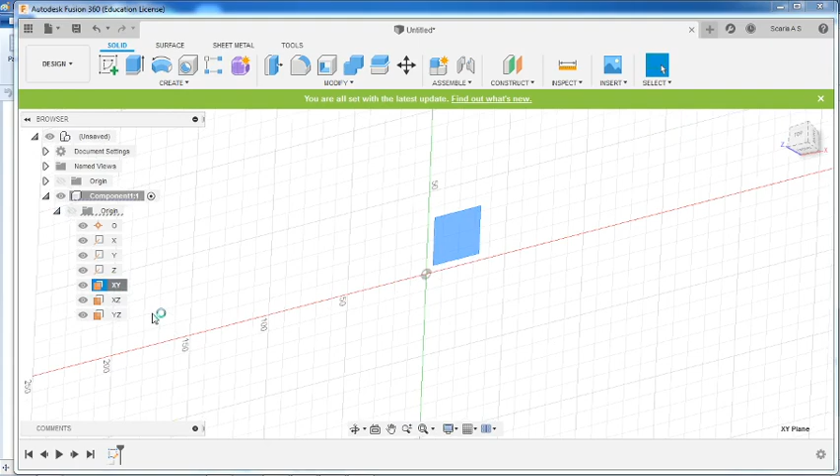Insert a new component, select our top plane, right click, create sketch. Draw a rectangle. In this particular exercise we will do it this way: create a point at the middle here, another one at the middle of this, then we will make this.

Then we will give this dimension. This is 290 and this is 140.

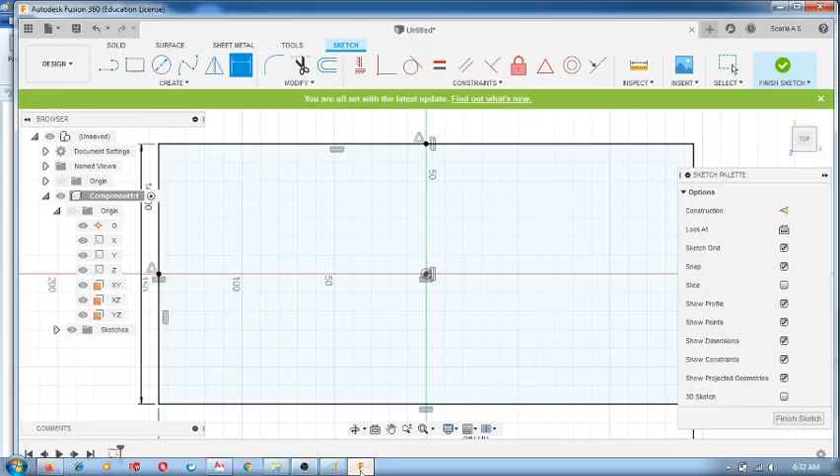I think we will draw the holes also. Let us draw the holes, making all the holes equal with equal diameter.

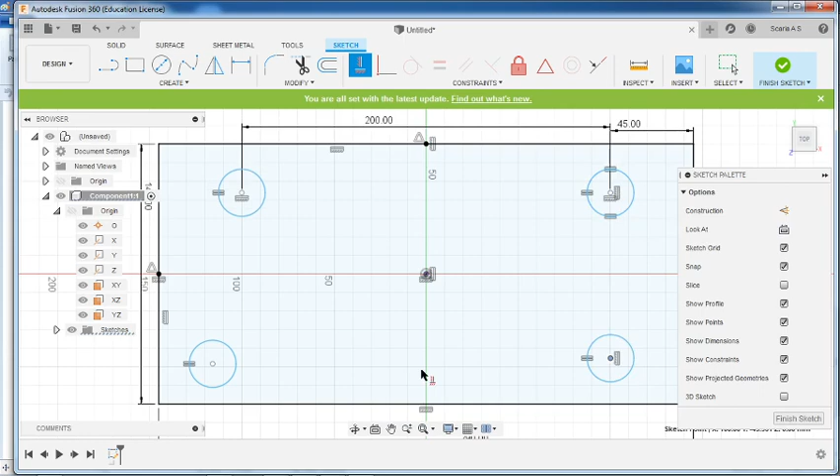Just define the dimensions 45 and 200. So this is 45, 200. Let me make this horizontal, this vertical, again this horizontal, this vertical.

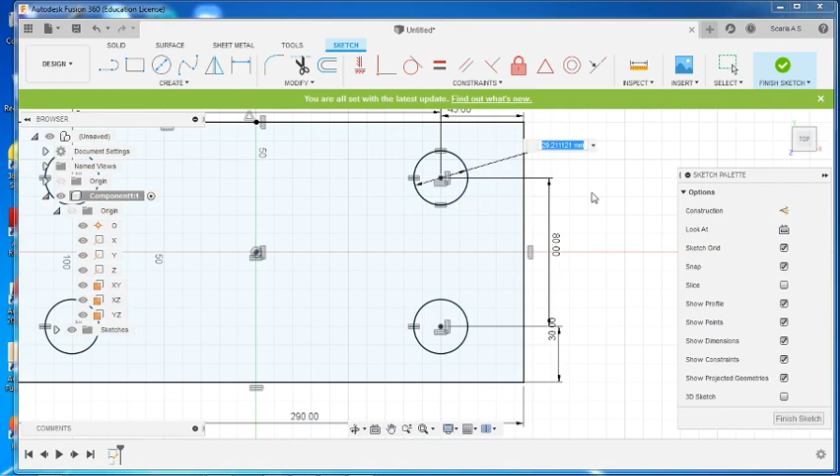Finish sketch. Now we will extrude. This height is 40. So this is our component.

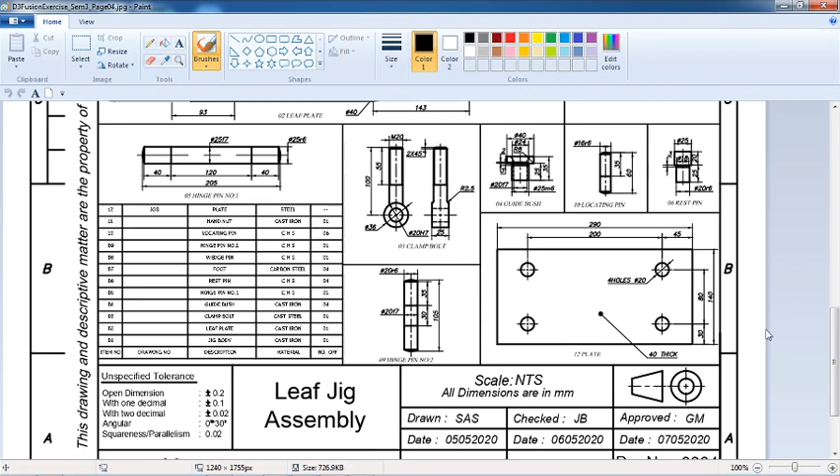Now next we have to decide. We will be making the base plate where the component can be located. So this is our base plate or jig body. Let us start this. I think it is better to choose the top view as our reference.

The total length is 510 and the width is 250, including these two projections. So we can select 200. Total length, let us say this is 510, subtract 25, so 510 minus 25. So we will draw this.

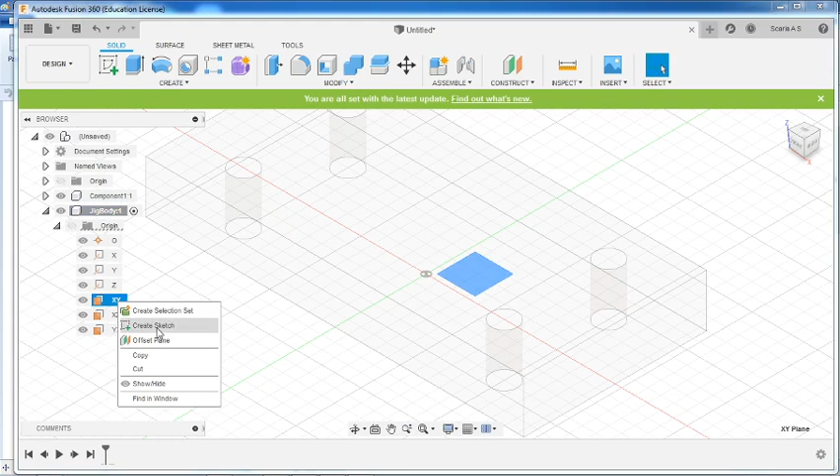New component, rename this as jig body. Once again, here we are not switching on the origin. We have got all the information on how to select the particular plane. So go here, create a sketch. Let us draw a rectangle.

Simply draw a rectangle, and this dimension, this length here is 510 minus 25, that is 485. This length is 200, 50 we will add later. This is 200.

I think we will right away make the other clamping provision also: 25, 25, 40. Let us draw that also, draw a rectangle. Draw both and make collinear.

Let us trim, we'll trim the opposite way. Then we will give equal. This is 25 and this is 40.

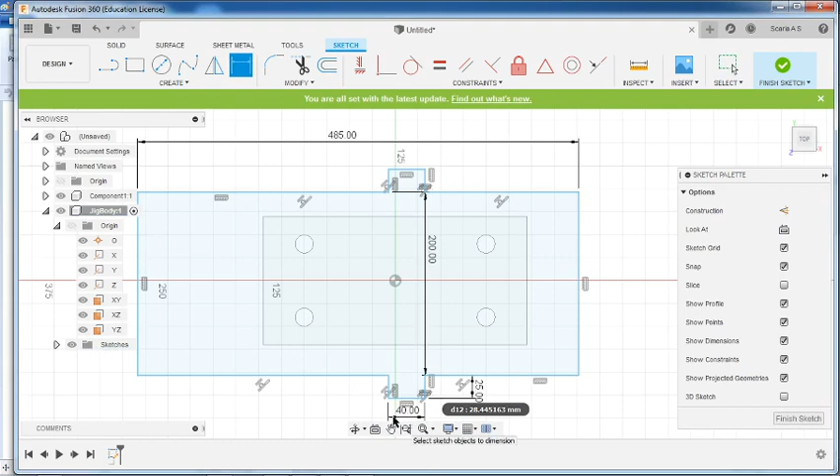Now we have to locate some dimension from the edge of this hole. So that is the next step. We have to find any hole which has a given dimension. If it is not given, we have to find it out. So let me check it out.

We can see one thing: this is from the center of this particular object, 100 away. And here it is given, 227 towards the center. So I think we will find out this dimension, 163, 30, 60. Let us make here also.

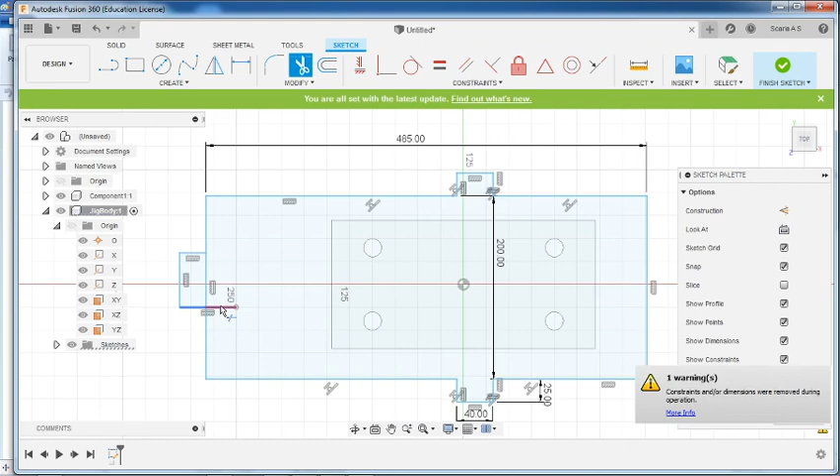Let us draw another rectangle here, then trim it, and give the dimensions. This is 40 and this is 25, 25. Then just make some points, that is 60, 30, 163.

Just create a few points here. Now give the dimension from here to here, it is 60. Forget about the 30, now we will give 163 plus 30.

Towards the middle of this, create one more point, 163 plus 30. This dimension we will use later. Now we have got this point, from here we can define another these 4 holes.

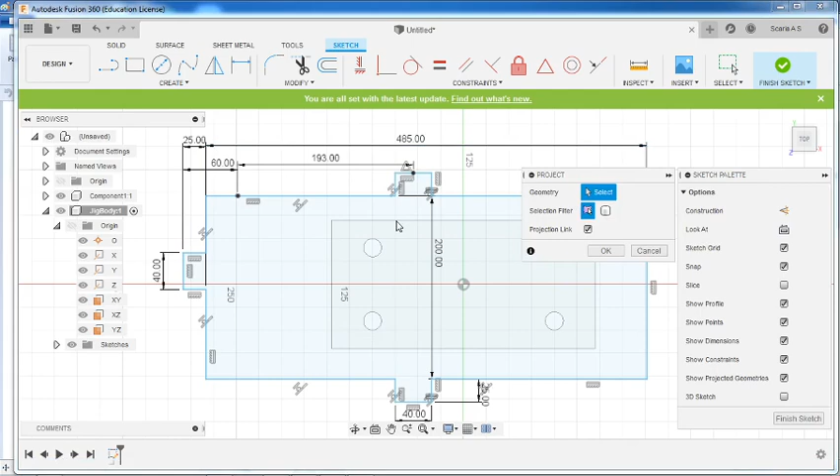Let us do it this way: let us project these holes, press P, so these 4 holes will be at the same location. Project one by one, not the face, only the circular edge we have to project. Now we can define the dimensions.

From the middle of this we will give the dimension as 100, from here to this particular edge will give the dimension 100.

Now one more dimension we have to find out. Let us imagine this is located at the center, so we will give 40 from the origin, so from here to this center, it is already aligned.

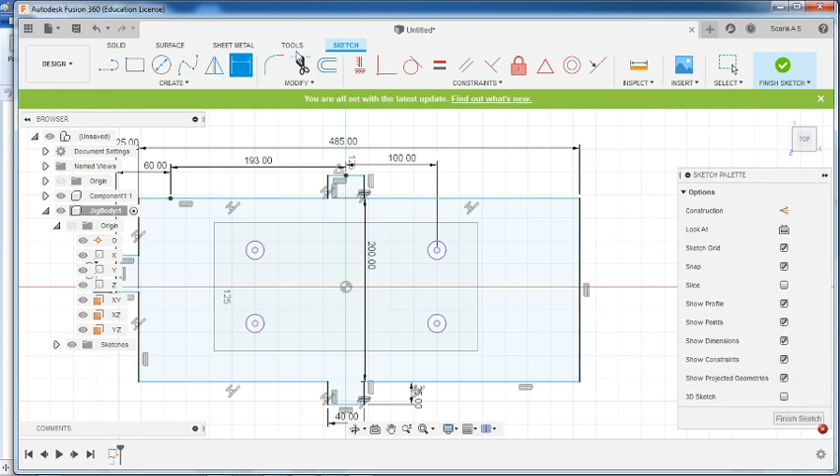Now we have to give symmetry, that's all. Just draw a line, then convert this line, otherwise we will give the distance. The total distance is not given, so let us give that one: 200, it was given earlier.

And from here to, let's say, 100. This also we have to ensure. Let us give equal, so let us give this both equal.

It's not working. Okay, let me try this again, equal. Both these lines are equal. It's not working.

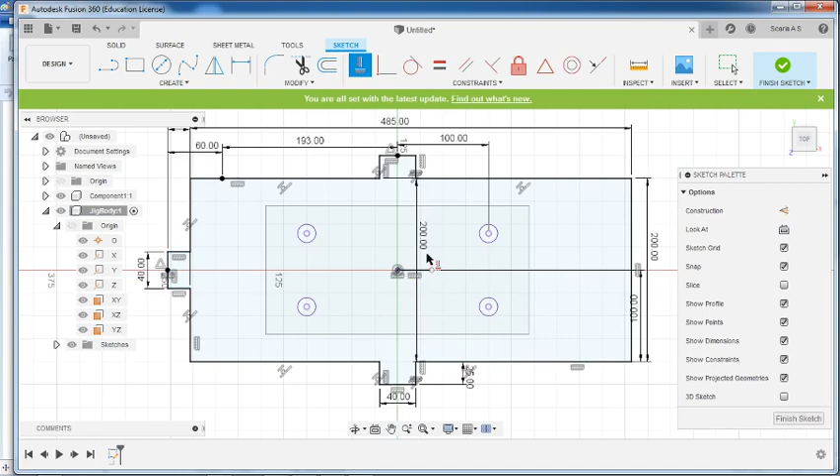Okay, so what we will do is create one more point, create a point, now let's say, okay, now we will extrude this.

So many holes are there. If we need, we can make these holes also, 150 by 78, 150. From the center we will make the other holes also. Let us make those holes, 1, 2. Let us make all 4 holes, then make it equal. Then, let's say horizontal here.

Vertical, this is horizontal, then this is vertical. Now, so we will draw once again another line, a center line. Select the line and press X.

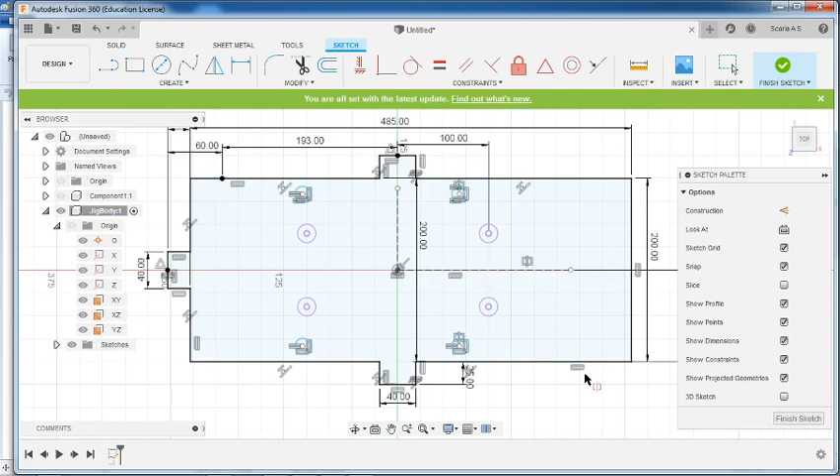So actually I want to, let me turn off this component here. It's X. Okay, now let me make a symmetry constraint. So this center point and this center point, symmetry about this. Once again, this center point and this center point, symmetry about this.

Now let us give the dimensions. So this is 150, 150, and what about this 78, 78. So from here to this is 78. Okay, I think only one dimension is required, automatically it will maintain the other dimension.

Now what is the diameter? Dia 16 H7, 6 numbers. So this is 16. Now another 2 more holes are there, so here from this center it is 53, 35, 35.

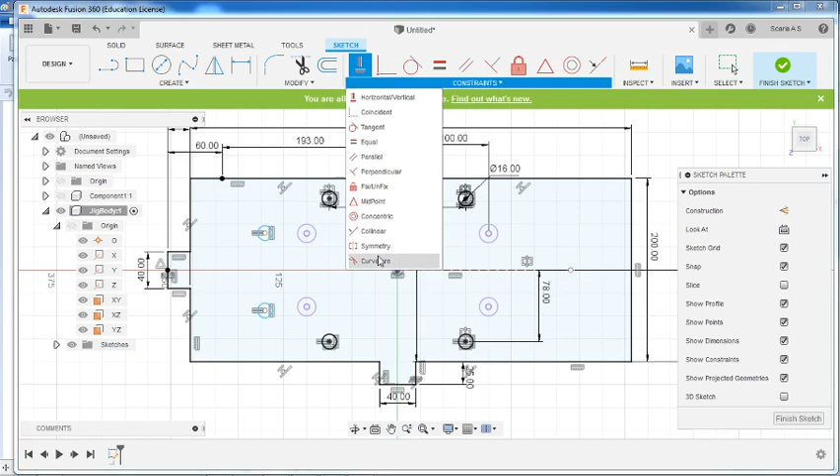So let's say equal. Then we will give symmetry also. Symmetry, this. Okay, now from this hole it is 53. This is 53. Only one dimension is required, so let's say this is 35.

So let us make another 2 more holes, 4 more holes, that is dia 20 H7, these 4 holes. Okay, let us draw somewhere else. So let us make equal. So here a spot face is there, that we will do later.

Diameter 20, so first we will give the diameter 20. Okay, then horizontal and vertical we will add. Horizontal, so this both are horizontal and these both vertical. Okay, now let us add symmetry also. Symmetry, similarly here.

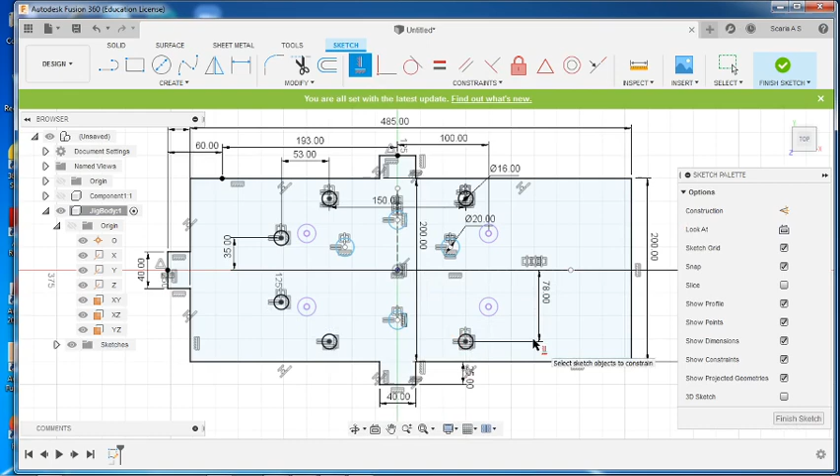So this is passing through the center, so we can give vertical constraint with this center point and this center point. Similarly horizontal with this. One 125, 50, 50, so 2 dimensions. So dimension, this is 125. This is 50.

Okay, I think most of the entire whole features are completed. So remaining things, okay, if we want we can make these things also, 4 holes, dia 40 H7. Okay, we will do it later, after making the fillet it will be very easy.

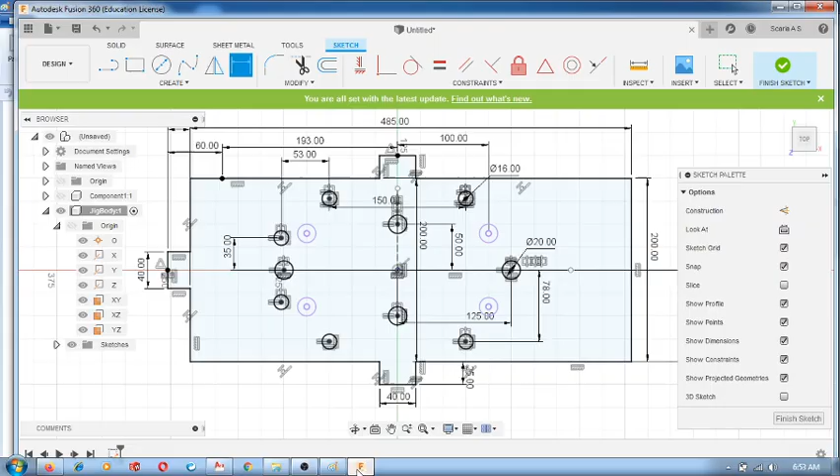Now the thickness is 35, so this thickness is 35. Let us extrude, finish sketch, extrude, so this is 35.

Now we can add the fillet. So some small fillet is there everywhere. The value is not given, so it is not important. So R10 is given here. Any information available about the fillet? Okay, we'll give R5.

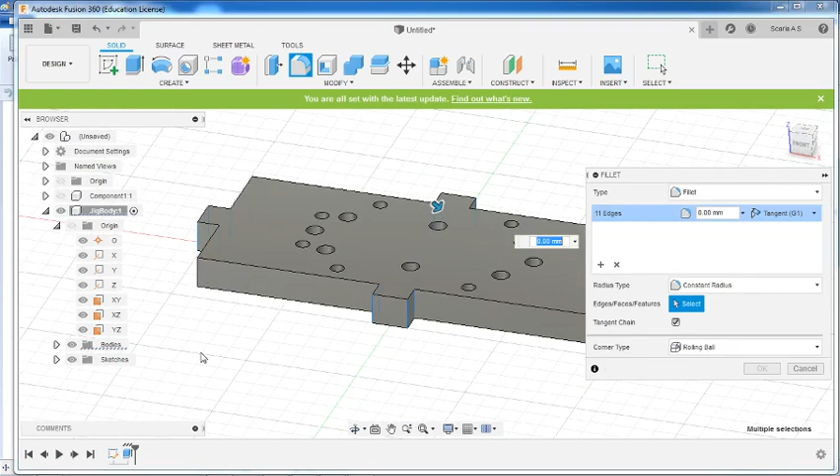So fillet, select all the edges, required edges. Okay, just that is not very important, we will give R5. Next, here we have to make a fillet, so that value we have to find out from here.

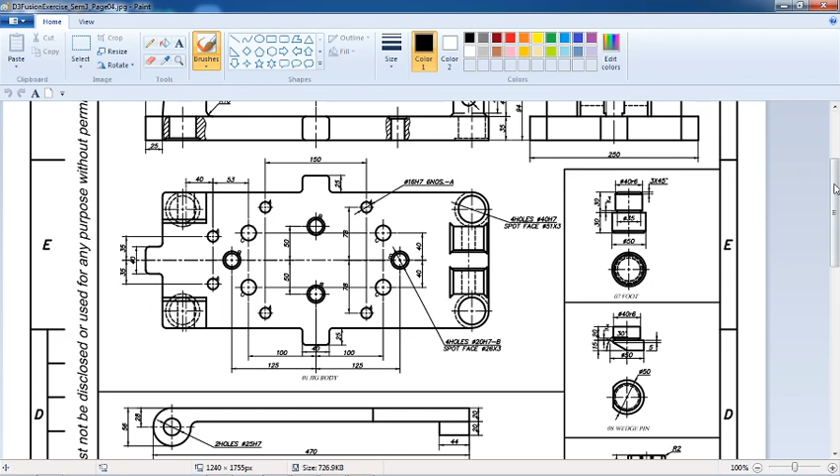Okay, so this counter bore, what is the spot face? Dia 51. So we will give a radius of 25. So fillet, this one, these two edges we will give 25.

Now let us make a hole. So here 4 holes, dia 40 H7. So we will draw that on the opposite side. Opposite side we will make. Okay, let us rotate this.

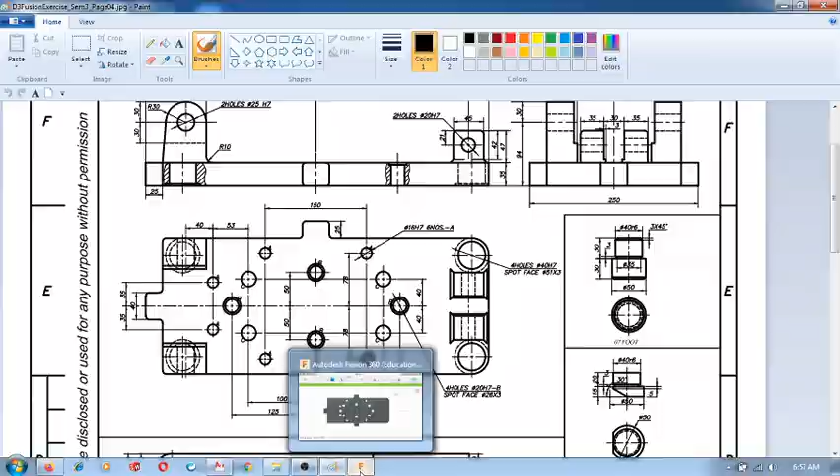So let's draw a circle, so equal, diameter is 40 H7. Also this dimension is not important, it is not mentioned here, so we will give the same 25, same value 25 from both the edges.

So before that we will make it horizontal. Okay, then vertical also we will make this. Okay, then from here to here it is 25. Finish sketch. Now extrude, so this extend all, then okay.

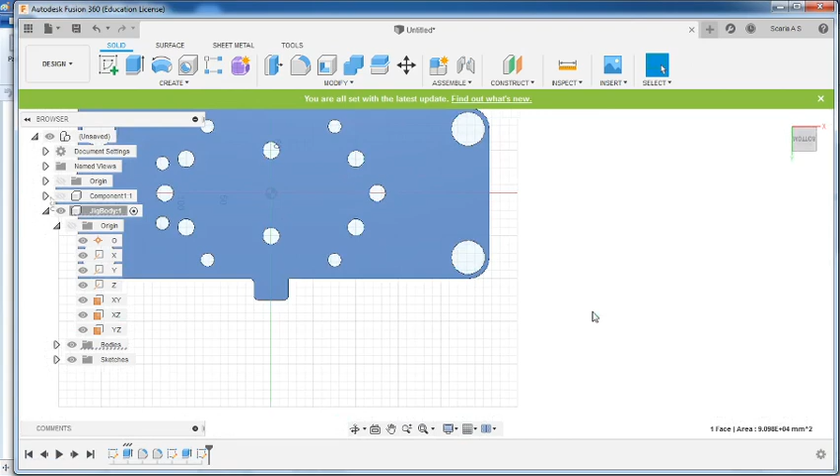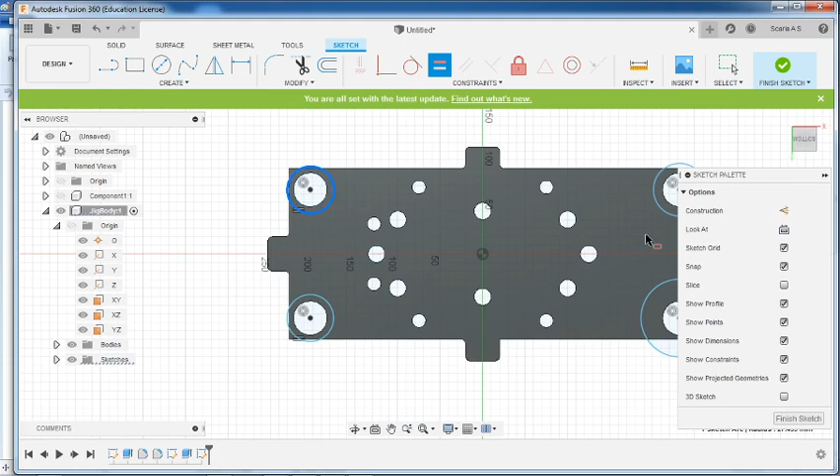So I think we will make the spot face also. So spot face dia 51 into 3, that is on the bottom side. So here, go here, create sketch. So draw circles, simply draw circles, so let's say equal, finish sketch, then extrude.

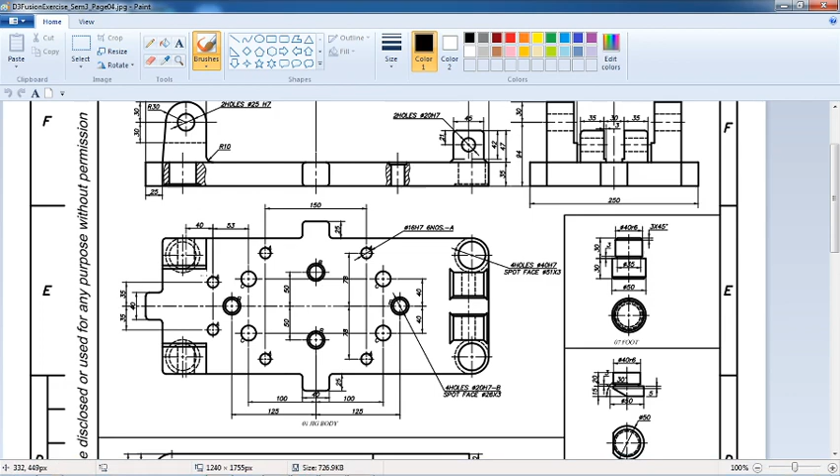-3. If required we will edit any of the dimensions, because okay, that we will find out later. This here also we have to add a fillet, so let us add fillet, 25. Now okay, I think this is not 25, some other dimension it is.

Okay, let us find out later. So now we'll draw this shape.

So how much is the distance? 120 mm away from the center, so 60. Let us offset a plane, construct offset plane.

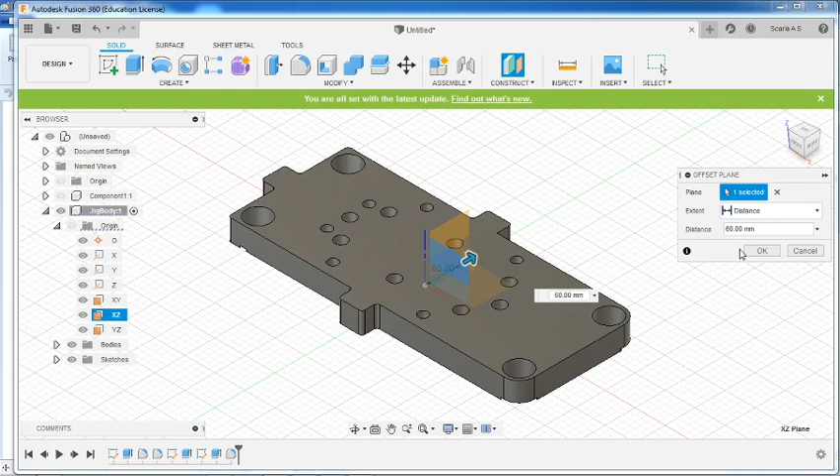So this 60, give 60, minus 60. Okay, 60, we will make 60. Then on this plane we'll create sketch.

So let us draw the shape. Okay, just simply draw this shape. I think the shape looks something like this. So here one is vertical, another one is at an angle. So this one is vertical.

Now we will give coincident. So this coincident. So from here it is 60 and 30. Sorry, this is not coincident here. Okay, so let's give the dimension. This is 60. This is 30.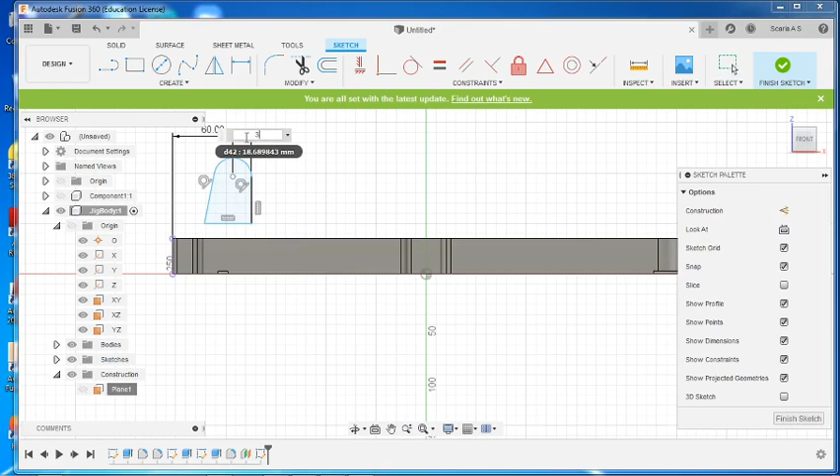Now let us make this coincident. Okay, otherwise we will give horizontal. So 60. So here 25, so we can give from here to this edge as 25, and the height we have to find out.

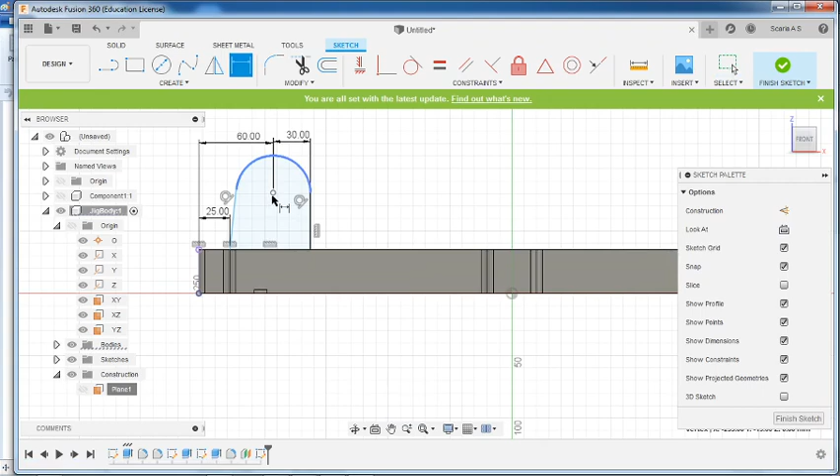Total height is, from the bottom it is 94. So this from here to this center it is 94. I think let us make the hole also here, that 25H7. So this is dia 25.

So this we can extrude 40 mm height, then mirror it. Finish sketch, extrude 40, then OK.

So this circle is at the middle of this, so let us edit this. So this circle here, the sketch, instead of 25, it's 30.

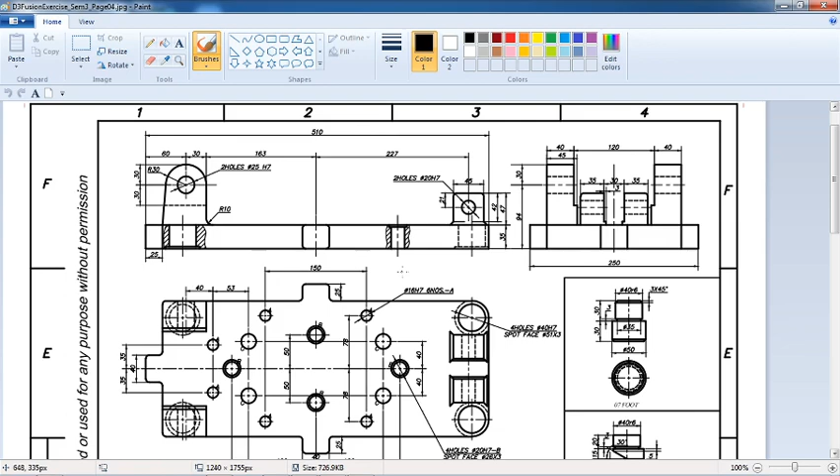So this is how much? 25 plus 35. Plus say 30. So this is 30. Finish sketch.

Now here if you look at here, this particular portion, here we have 5 mm extrusion is there. From the center it is 30.

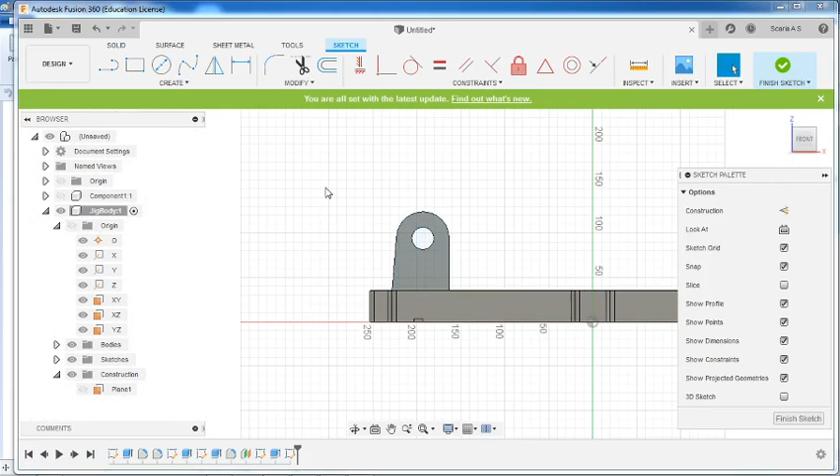So select this face, create sketch. So directly I am going to project this. Press P, select this face, then OK, then draw a line. OK, then give the dimension from this center point to here, this as 30. Now let us give coincident.

So this, OK, finish sketch, then extrude this 5 mm. What happened here? It's not new body, join. Okay.

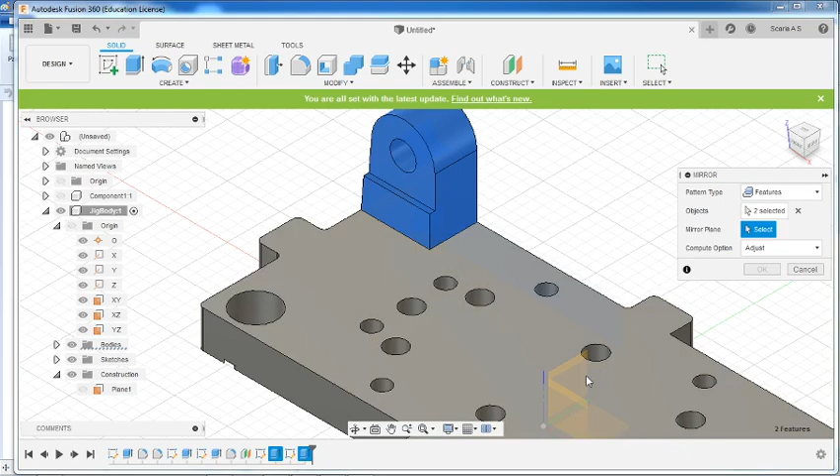So now we can mirror this feature. Create, mirror. So features, both the features, this extrude, then mirror plane, select the mid plane, then OK.

So I think here this fillet, okay, let us find out later. Okay, this is over. Now here this particular portion we have to find out.

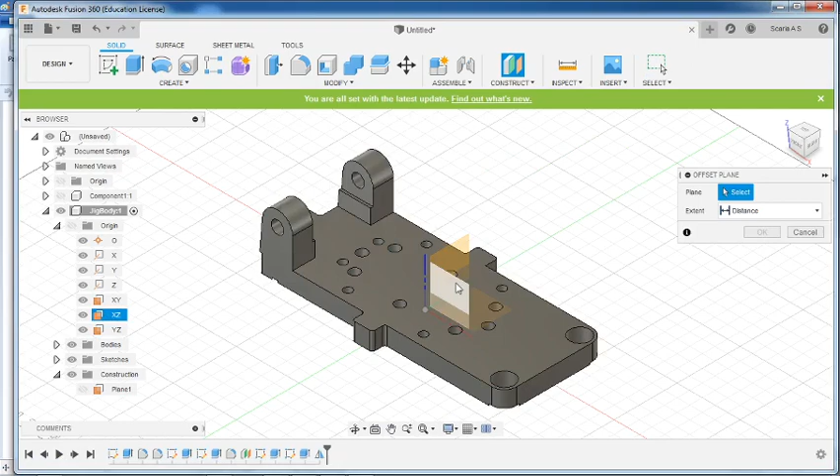So this distance is 30 mm away from the center. So 15, we will offset a plane, construct offset plane. So from here 15, and on this plane create sketch.

So let us draw a rectangle, then check the sketch. So the height is the height, 47, from the base. So let us give the dimension. This is 47.

So this I am giving horizontal. Then 45. So this is 45.

Then this edge here, some chamfer is there. Okay, now we have to find out from the center. It is 227, so there is a distance 227, so we will make that.

So create a center point. Okay, then from this point to this point, it is 227.

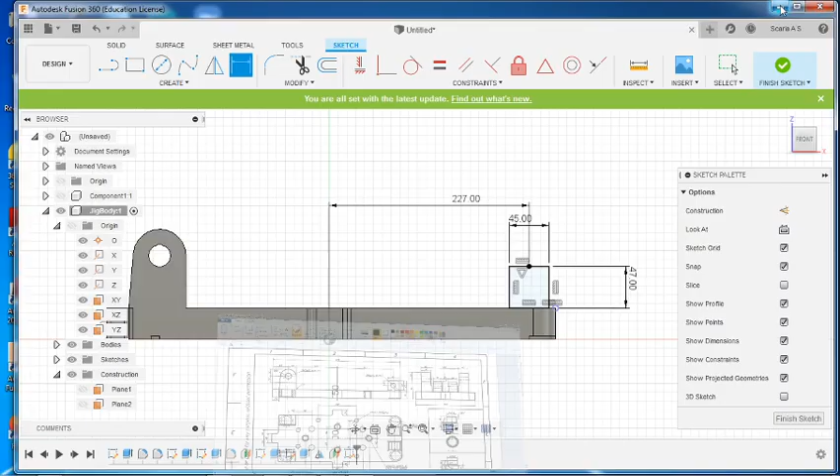I think we can draw the hole also. So 2 holes, 20 H7. So let us draw. So this diameter is 20. Then let us give vertical, 21 from the top. Okay, so we can finish sketch.

So now what is the thickness? 35. Extrude. So it's 35. Okay.

Now here again there is a small extrude portion, three mm. What is the distance? Distance from there 42. So on this face, create sketch. So press P for project. Okay, then draw a line.

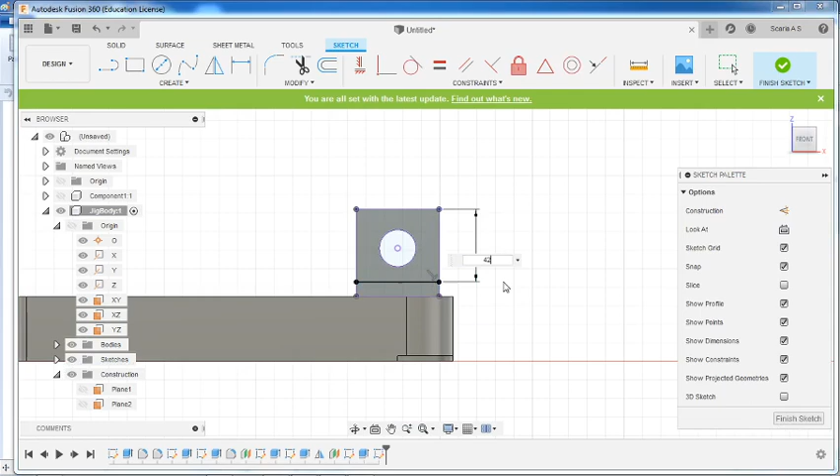And this is 42. Finish sketch. Then 3. Extrude. Here 3.

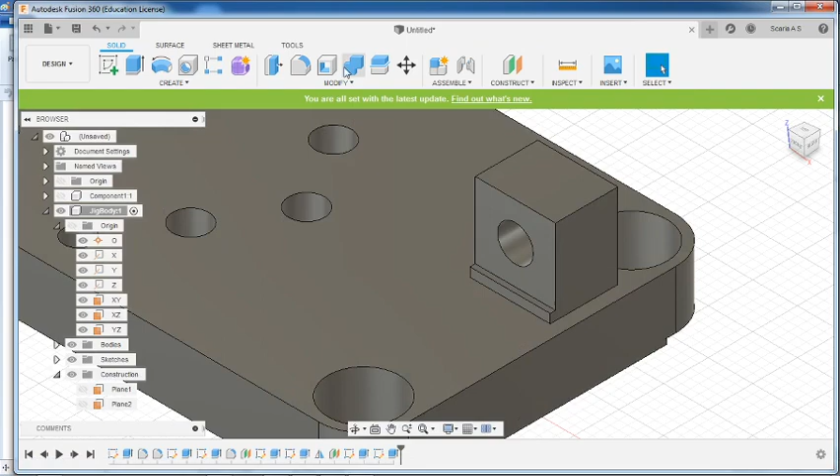Now we can add chamfer also everywhere except this end portion here. Modify chamfer here.

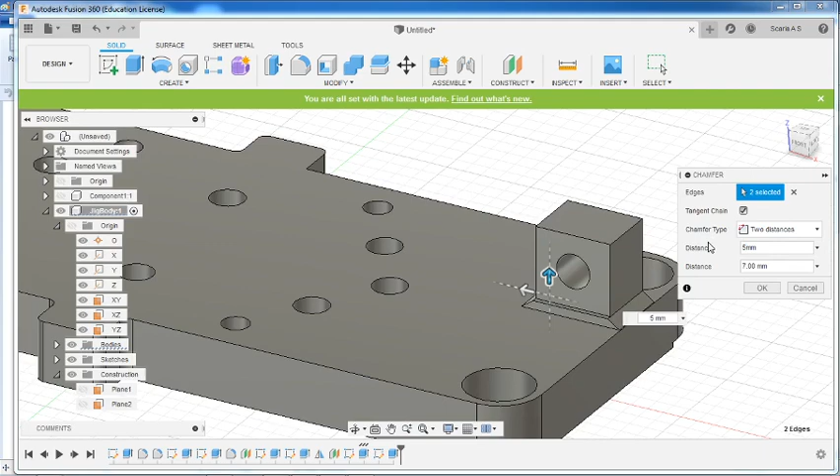So let's give 3 and see. Five, I think 6, 7, 8. So we will give this 2 distances. One is 7 and the other side is 3. 4, 5. Okay.

So let me edit this. So 7.5. Okay, something like this.

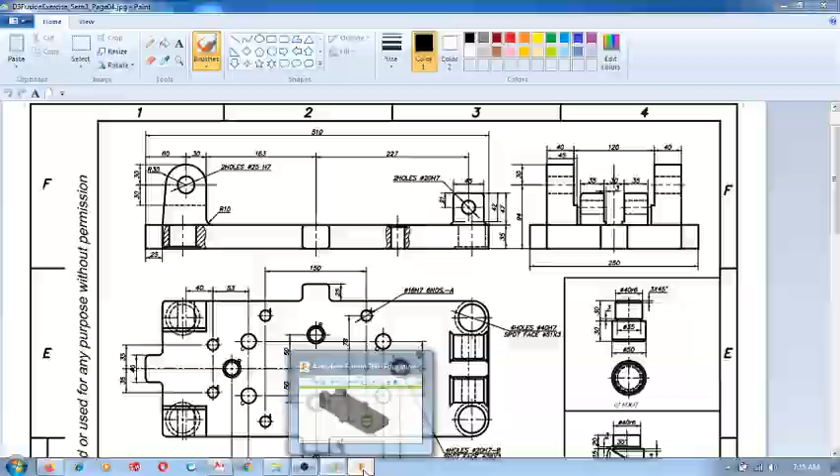Now we can add fillet on these 2 edges. So same 5 mm fillet we will give both edges, 5.

Now we can mirror it. Create mirror. So features, this extrude. Okay, first we will start from here. This extrude, second extrude, this chamfer, this fillet. Okay, then mirror plane is this, then okay. Oh,

Okay, let me select only this extrude. Okay, let me do once again. Create mirror features. So this extrude. So start this extrude and both this extrude, then mirror plane, this mirror plane, then okay. Why?

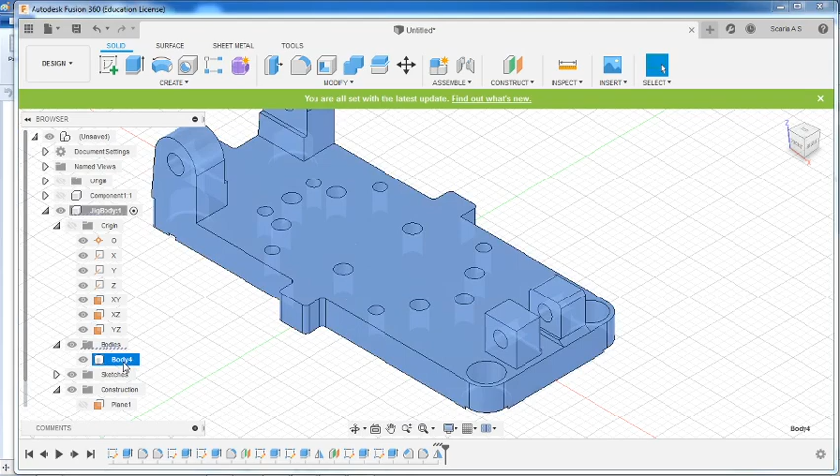Okay, let me add the other two features also. Edit feature, then go to press Control, then okay. Okay, so it is added. Now

So here we forgot to add the spot face 26 into 3, here 4 places. After adding that, I think this particular body is completed.

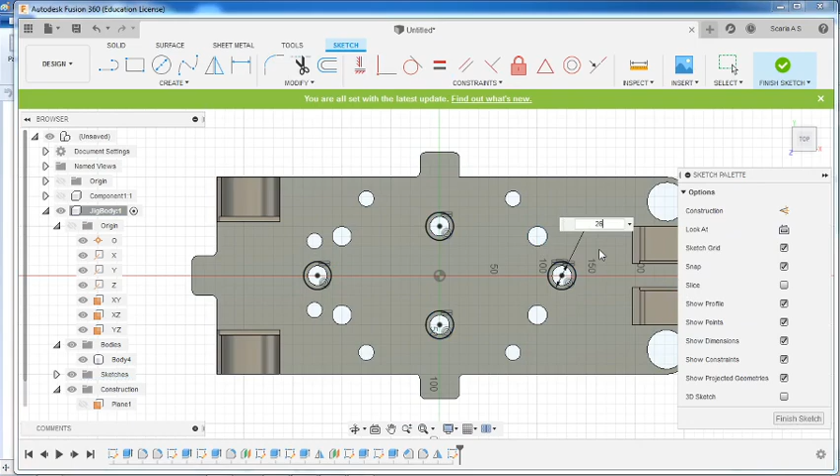Dia 26 into 3. So go here, create sketch, okay, let us add circles. Then equal, this is dia 26. Finish sketch, then extrude, so -3.

Okay, I think so if there is any fillet, let me check that also. We will make R10 fillet is there, so that we will add the R10 fillet. So fillet, this is 10.

Okay, I think everything is completed. Next we will make this portion. I think it is better to start using the front view. This way we will add.

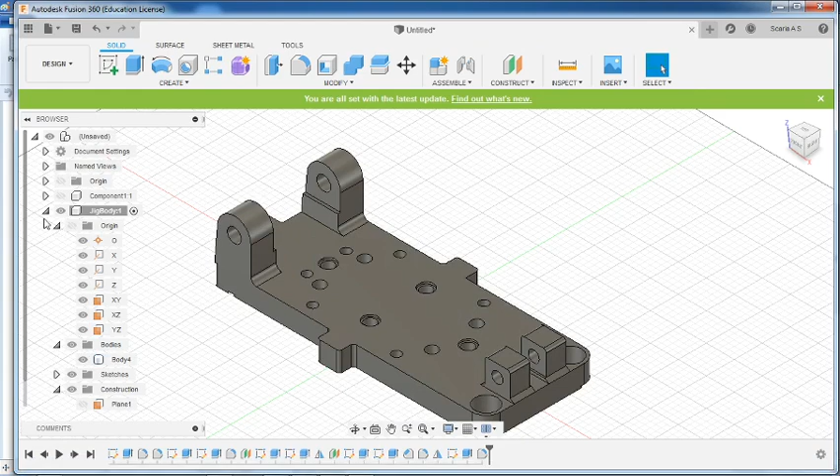Okay, add a new component. And what is the name of that? Leaf plate.

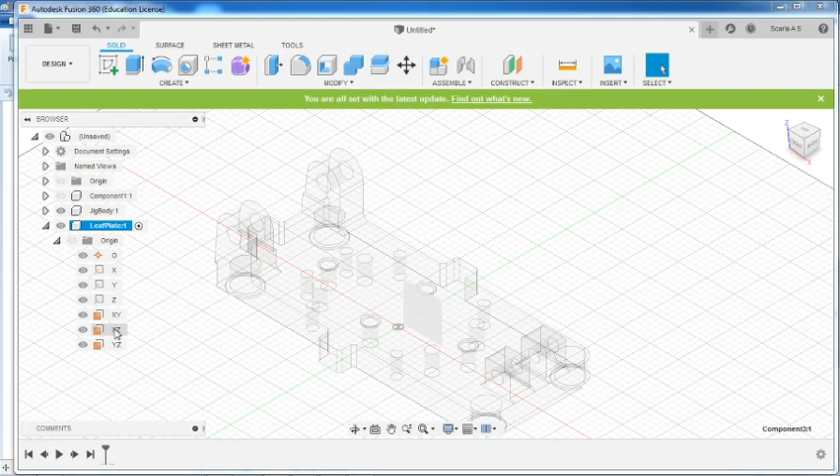Then once again we will select the XZ plane, create a sketch. Now if you have the understanding, everything will be coming and coinciding with these circles here. So we can project this. Press P. If you know how the leaf jig works, you can automatically press P and make the assembly here.

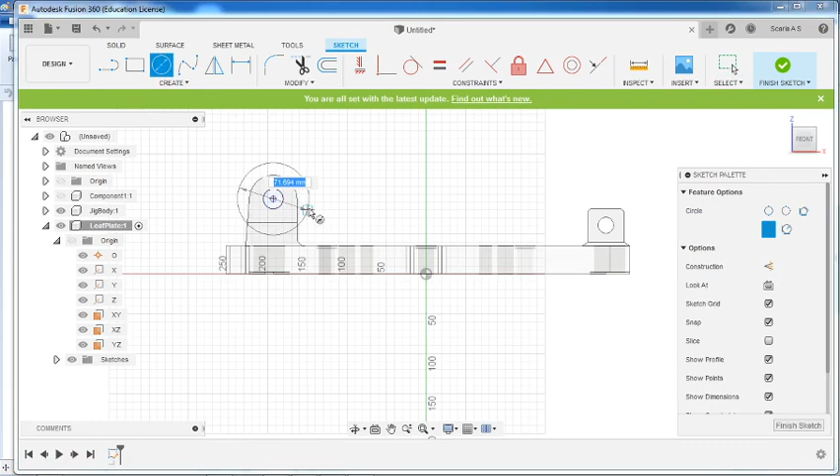So this is dia 25, and this diameter is 56. Let us draw a circle of diameter 56.

I think we will draw this till the end here. How much is that? We have to maintain the dimension using 93 and 325. We'll use 93 from this hole.

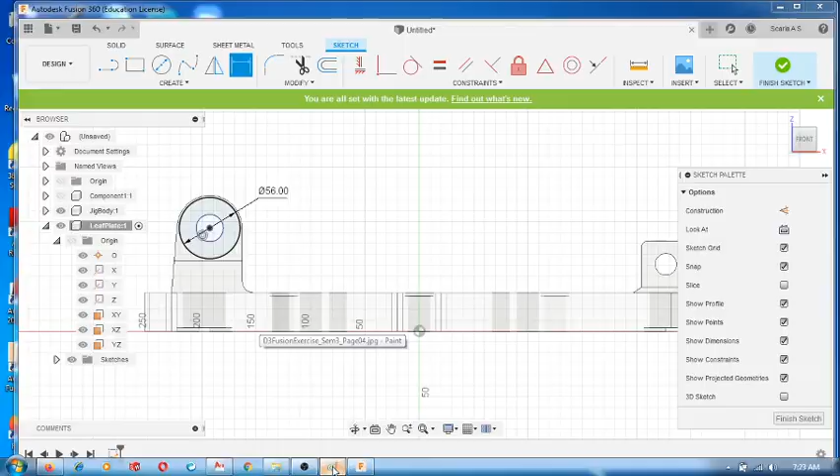So how to do that? We know from here to this center is 100, right? 100. So 100 plus 93 is 193.

So we will draw a line in this way. This is 20. This is 20. Then we will give coincident. This is coincident with this. We will add a tangent also.

Let us coincide here also. I think we will trim this portion. This is not required now.

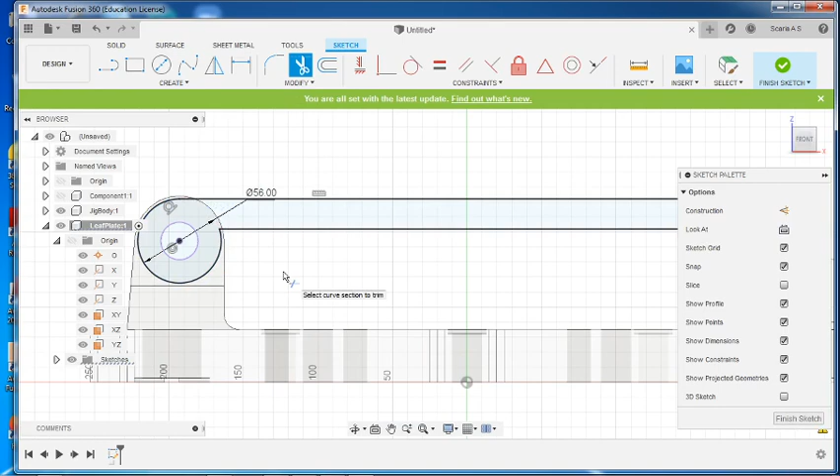Now we have to ensure the other dimension. From here how much? It is given 470 from the extreme edge here. So we can give directly 470.

Select this, then bring here, right click, pick circle arc tangent. This is 470. Okay, that's it. Now we can extrude.

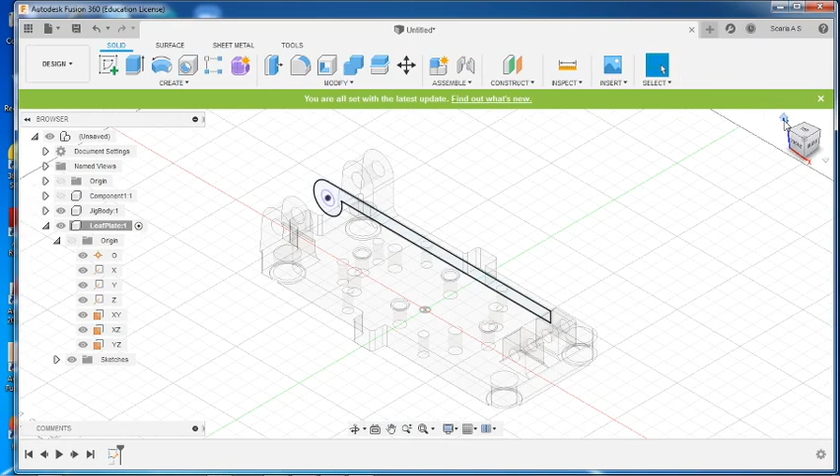I think we will extrude 120, then we will do the remaining portion. 120, finish sketch, extrude. So this is symmetric, this whole length is 120.

Now we will select this face, create sketch. Just press P and select this face, then OK. Now draw a line, find out the dimension.

How much is this? 35. How much will be this? 7.5.

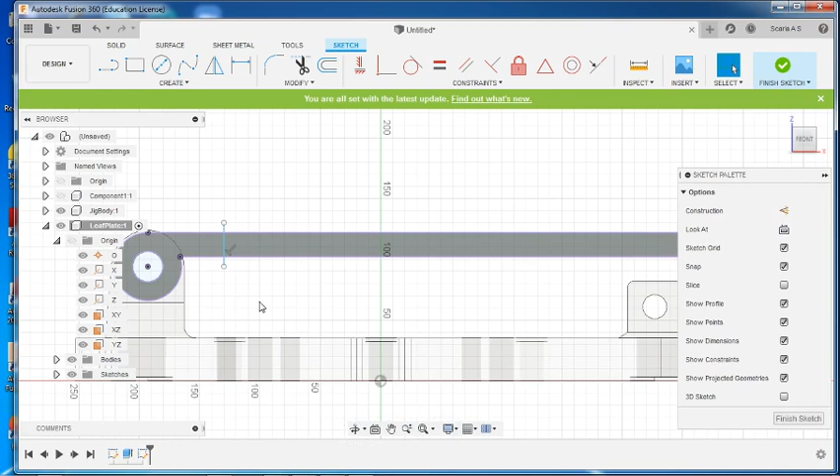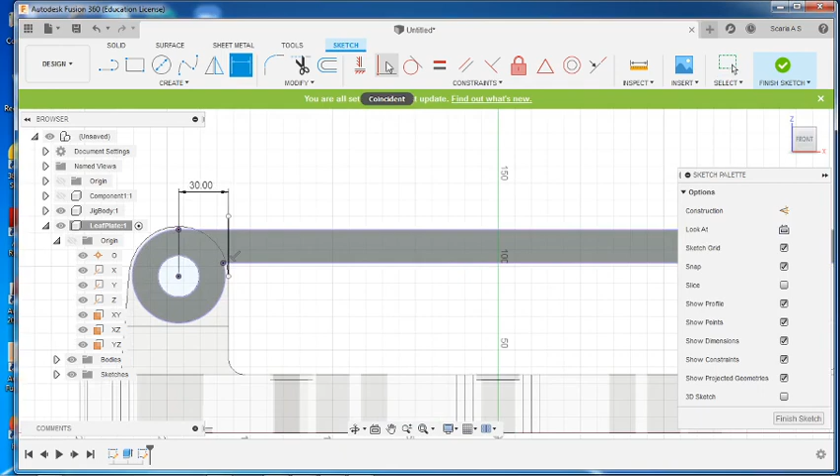Okay, we will use the curvature for this, we will give some dimension. Let's give 30, then coincident. Finish sketch, then extrude. This is 7.5.

Then we can mirror it. I think this. Create mirror. So this last extrude, then mirror plane, center plane, then OK.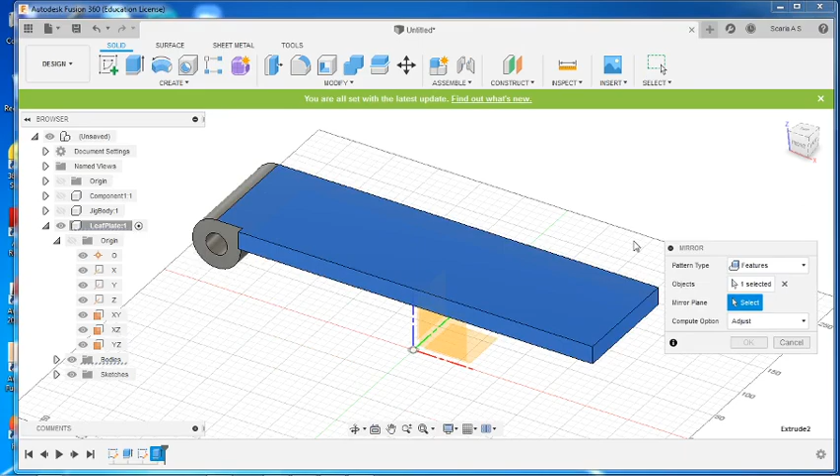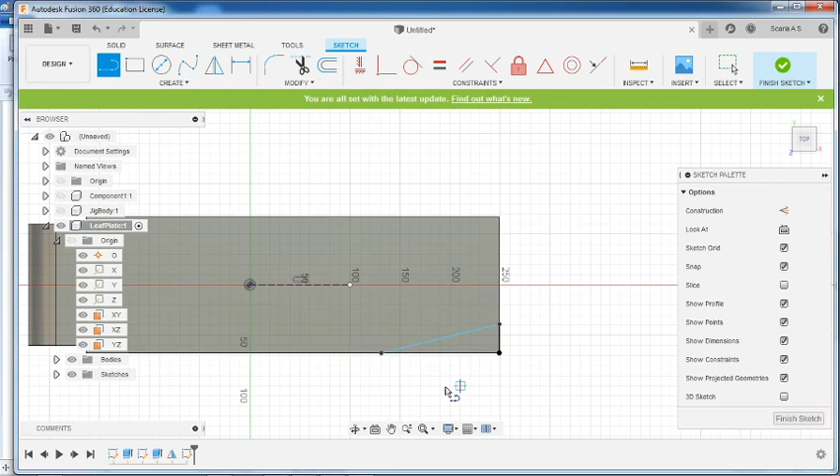Now we will add the angular cut, 143, 98. On this face, create sketch. Just draw a line, select the line, press X.

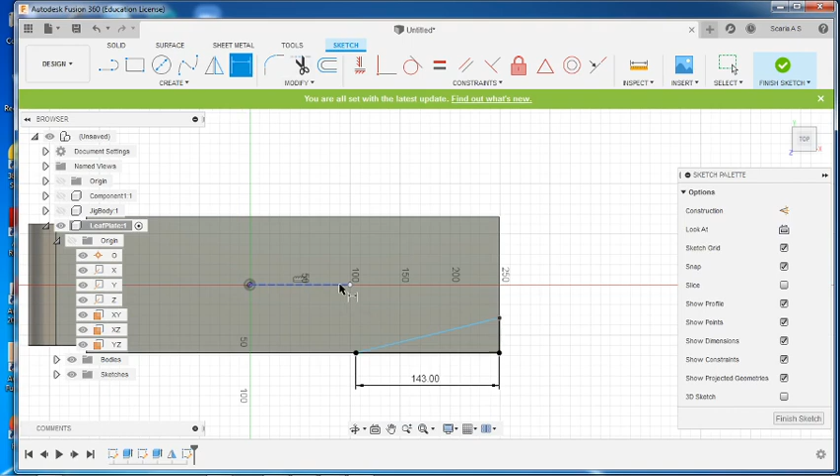So it's 143, and this is 49 or 98 divided by 2. Finish sketch, extrude, all, then OK. Then we will mirror it, create mirror. So this feature, mirror plane, this is the mirror plane, then OK.

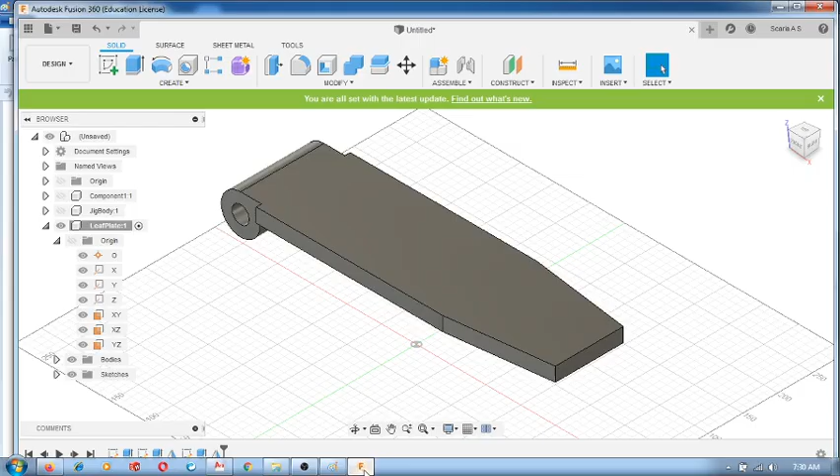Now we have to make all these 4 holes. Let us quickly make all 4 holes. The hole diameter is dia 25 H7. Create sketch. I think we will do it on the component.

This body I'm going to turn off for a while, so that we can press P and project. Press P. This is the easy way to get referenced with the existing. Then OK. Now let us draw circles. Let me give equal. I think I will make this as construction X.

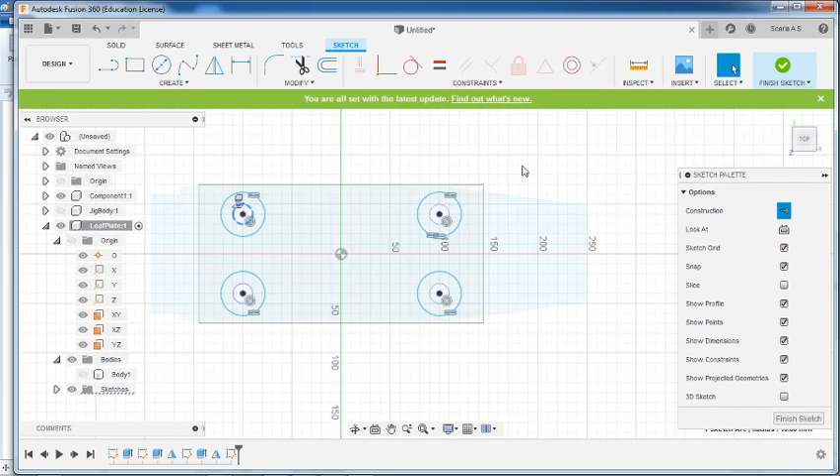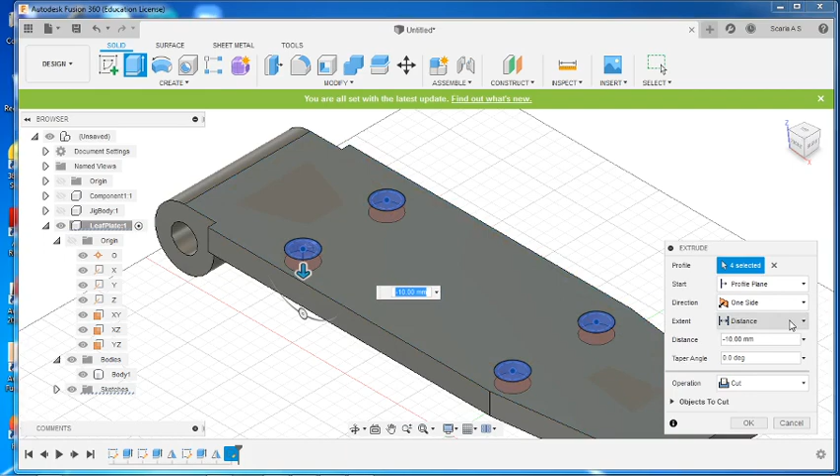Now we can give the dimension. This is 25. Finish sketch. I could have added one more hole. We will make that hole also in one step, otherwise we'll do it in the next step. Then change the direction, then extent all, then OK.

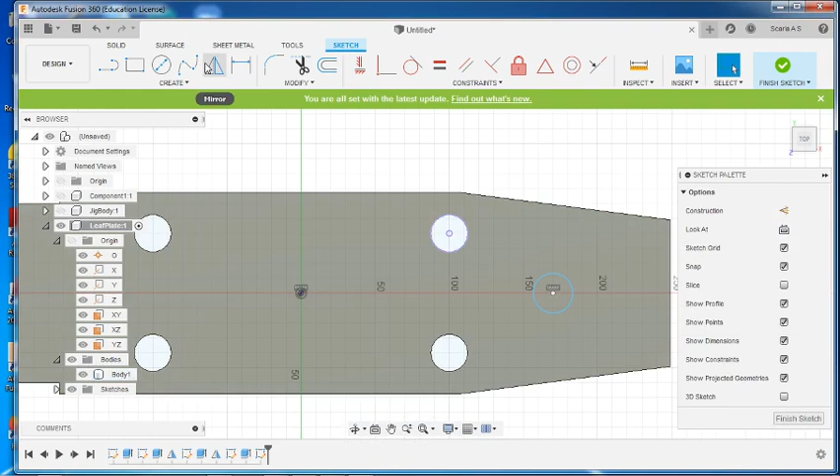Now on this face one more time we will create a hole. Let's say horizontal, and what is the dimension? From here 60 and the diameter is 40. Press P. And from here it is 60 and the diameter is 40.

Finish sketch, extrude, extent all, then OK.

Now here another, this slot also we have to make, 22. Create sketch. Let us draw in this way. This diameter is 22.

Let us give horizontal and one more dimension, 325 from this hole. We will do it in the same way. Press P, select this hole, then OK.

Then from this center point to this midpoint it is 325. I think we will coincide this also. Coincide, it's not important. Finish sketch, extrude. This particular portion, all, then OK.

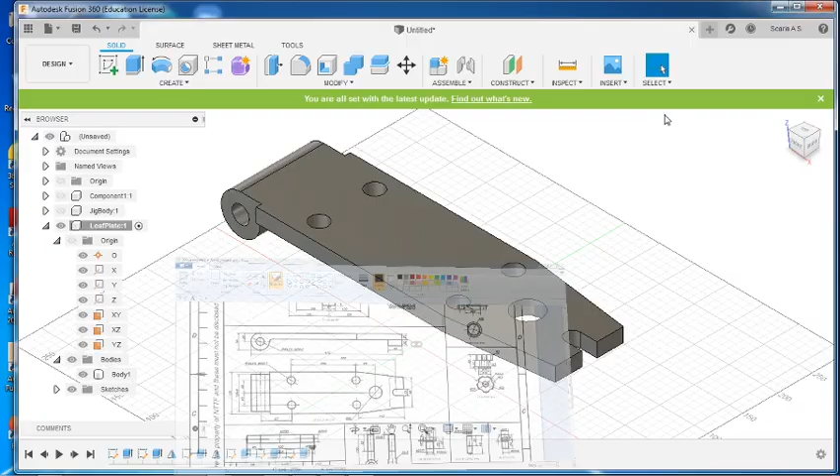Apart from that, here there is another extra projection, 44, that we will add. Rotate this, select this face, create sketch, then draw a line. This is 44.

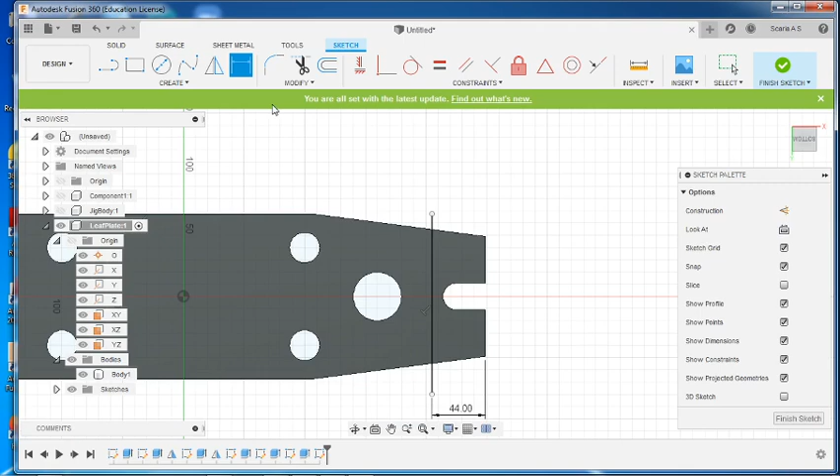Then let me project this, press P. So one by one we will project this edge here. Then OK. Now horizontal. We will draw a line to close this. Here also one more line. Then I want to trim.

Finish sketch, 20. So extrude, here it is 20. Here 5 mm fillet also we will give. Fillet, 5.

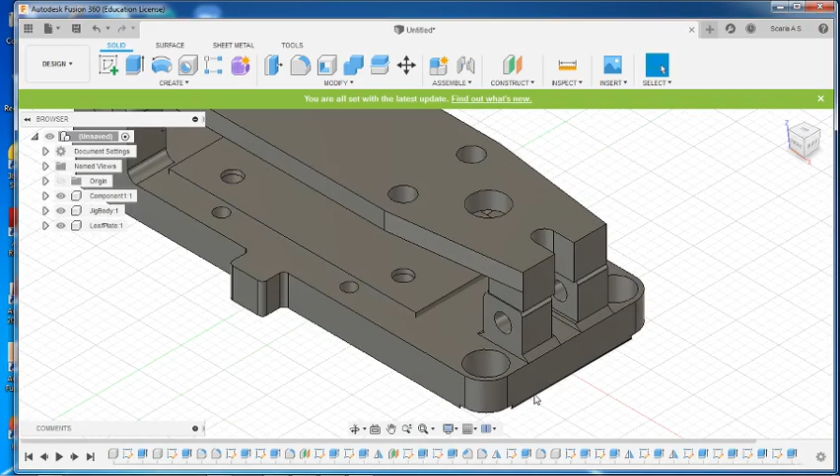Remaining things we will discuss in the next video. Okay, thank you.